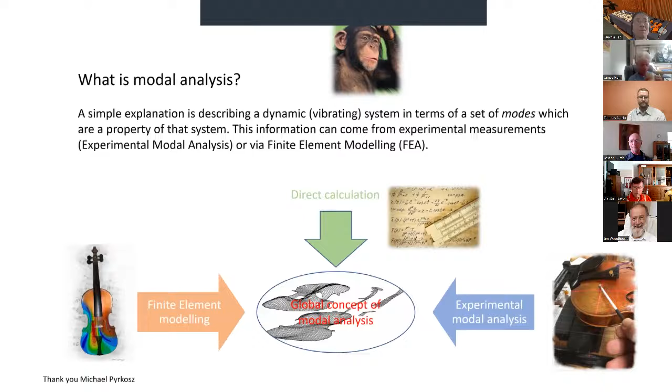So the first thing to say about modal analysis is what it is and what it isn't. So in fact, modal analysis is really a concept, meaning that you represent a system's dynamic behavior in terms of a set of modes, which are a property of that system. We can start to say where the modes come from a finite element model, or we can do it from measurements. And even for simple things, you can calculate it on the back of an envelope. So it's a concept rather than a specific activity or single task.

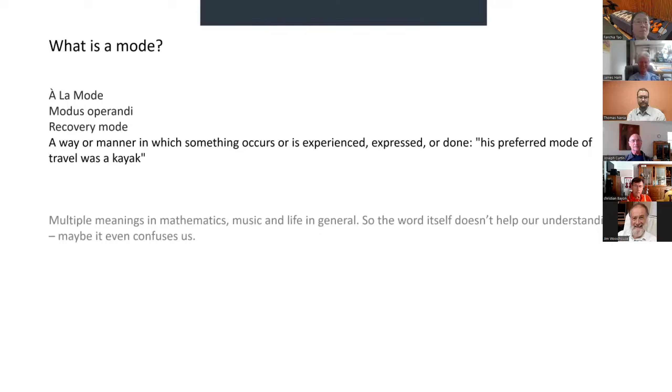Then obviously this is a question that comes up. What on earth is a mode? A mode. So I don't normally travel by kayak. So I think the first useful synonym really is resonance. So we're already familiar with the idea that various things sort of ring at a single pitch or multiple pitches at the same time. So I think if you blow over a bottle, that's quite a pure sine.

Okay. But lots of things have pitches simultaneously, and they aren't necessarily multiples of the fundamental, like a string. But anyway, let's not get bogged down. So this is an inevitable question, and there isn't actually a very easy answer, because you need concepts that haven't yet been explained. So the best way is just to start with some things that are kind of familiar. So we can say that a mode is, hang on, I seem to be missing a slide. Yes, got it, that's okay.

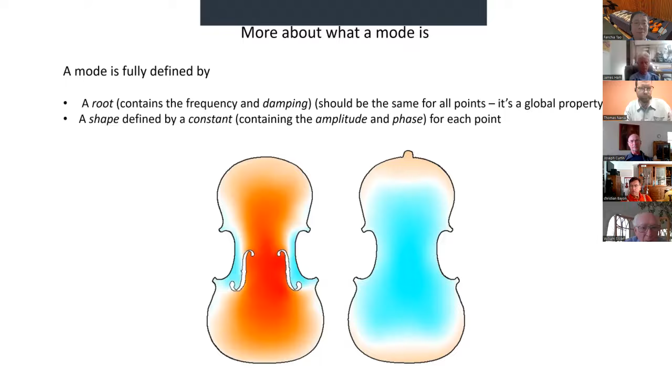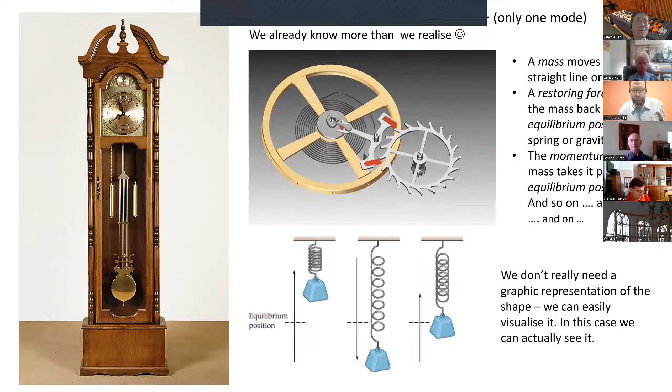And then we should be quite familiar with things like a weight on a spring. We can visualize that. So if the weight starts at its equilibrium position, we can lift it up or pull it down and let go, and then it will bounce, going beyond the equilibrium position and then back again. In none of these cases do we really need to create animations of them, because you can actually see it. It's slow enough to see exactly what it does.

Then a string does have multiple modes on the same system, and in this particular case, because the wave speed is supposed to be the same at all frequencies, the modes or overtones are very nearly a multiple of the fundamental, and they're always an integer number of half wavelengths. So the first one is approximately a half wavelength, and then you get two of them, 3, 4, 5, 6, etc.

So why do modes exist? In my mind, there are two main strands for this. One is purely about how the number of wavelengths fit into an available space, and examples of that are things like standing waves in a room. And then there's a similar idea. You could apply it to strings and beams, then ultimately to modes in violin plates.

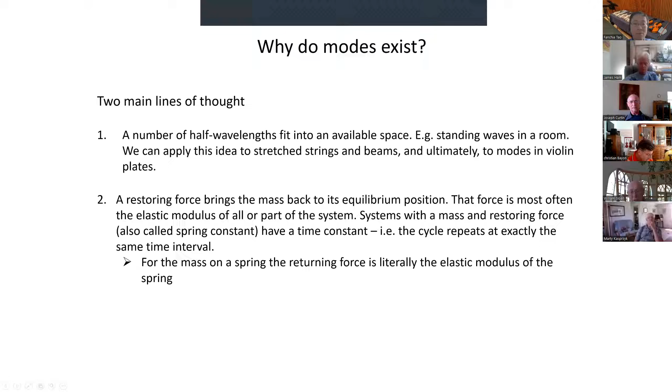In the case of the mass on the spring, that returning force is literally the elastic modulus of the spring. So you've neatly separated the two concepts into physically different parts of the little demo. And with the pendulum, it's gravity, and in the string, it's its tension, not the elastic modulus of the string, it's the tension. And in air modes, it's the compression and rarefaction of gases. So gases, if you can put them in an enclosed space, you can start to feel their springiness. Like if you put your thumb over the end of a bicycle pump, you can feel how strong the elasticity of the air is.

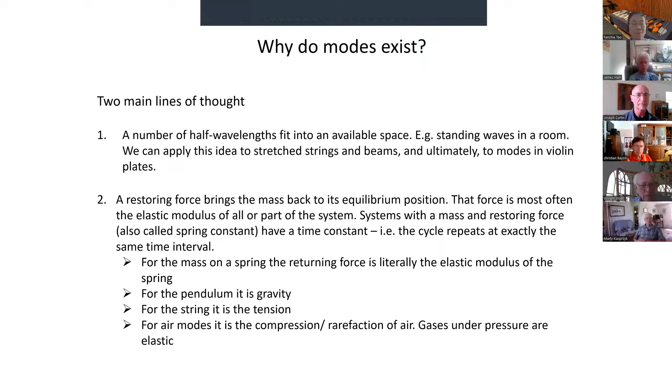And then if we animate them, we're going to have to slow it down, otherwise you're not going to be able to see it. It's too fast for the eye. And even better is if we've got a 3D animated plot that we can rotate at will to choose our view of it at any given moment. And then icing on the cake is 3D animated plots with a fully triaxial response, which we'll come back to in a bit, but that starts to get expensive and difficult, and that's not going to be one of the things the VSA kit offers.

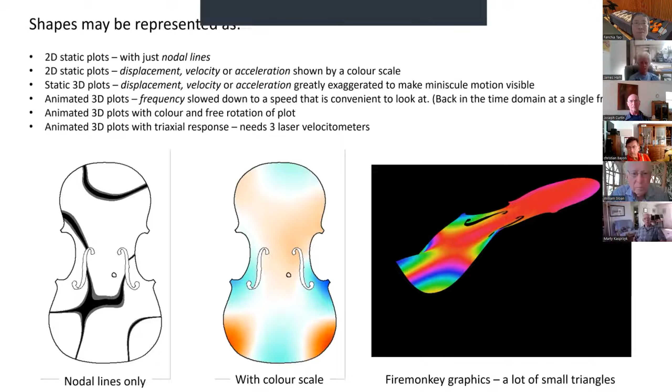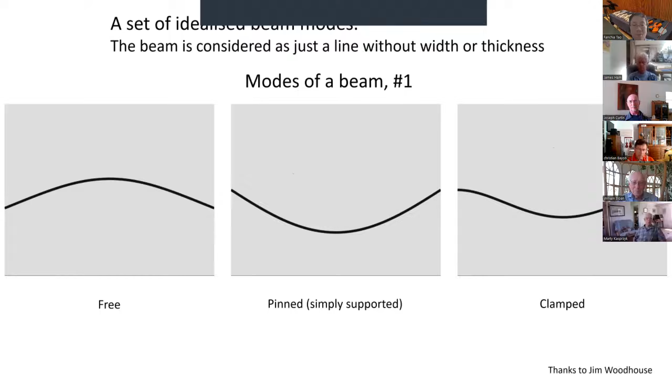I'm trying to, there we go.

So instead of being 1/2 wavelength, it's 2. And the animation runs a little bit faster to show that. So the ends are never nodes in a freely supported item such as a beam. In the case of a plate, you can have nodal lines that cross the edges, but they won't be nodal lines all the way around.

In the pinned ones, there's definitely a likeness between all three in the shape, it's just that the boundary conditions make them just slightly different.

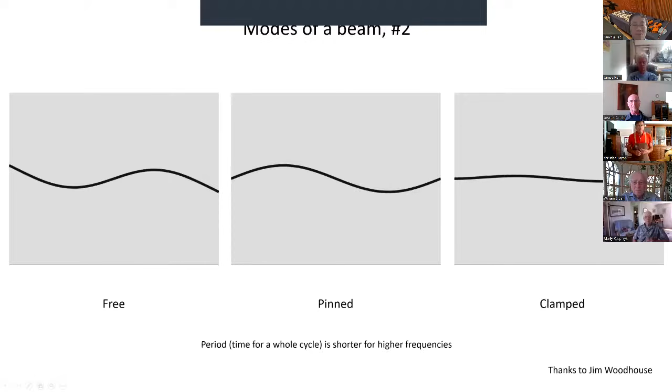Come on, next slide. And just the next one, same sort of thing. So we're representing the beam just as a single line. We're not making any attempt to make it visually realistic. Trying to, oops.

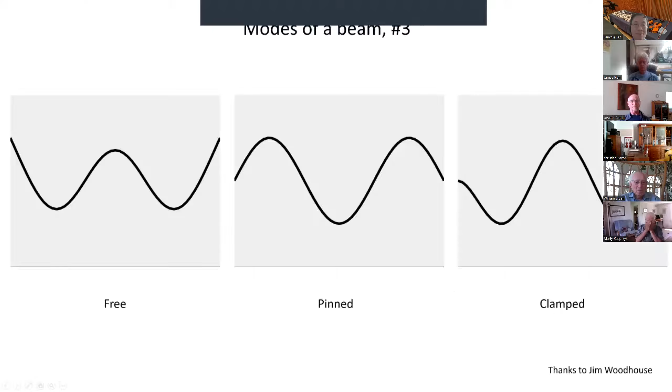This set are actual measured ones. I did some time ago a little course for students and makers at Bilbao. And one of the things we did was we measured a beam in different boundary conditions. And for the points that we needed to display the shape, we used 18 along the length, but that allows us to see the twist in the beam.

So because this was actually a real piece of wood, something like a cello bass bar, you find even at low frequencies, some of that motion that you would think would be just in the fundamental mode, actually a bit of twist gets introduced. That's just to do with the non-uniform nature of the wood. So you should be able to see that these look very similar to the animations that Jim Woodhouse has come up with for us.

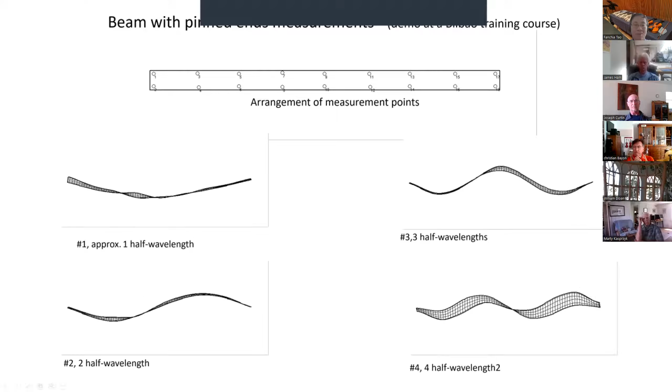So, trying to keep the mathematics down to a minimum here. Central really to everything we do with modal analysis and vibration measurements involves moving things between the time domain and the frequency domain. And in this black box in the middle is the Fourier transform. I call it the workhorse of acoustics and vibration engineering. And my little joke at the bottom says terms and conditions apply. So it's actually a very reliable algorithm, except there are some conditions one must observe to make sure you get good results. And I'll try and cover some of that a little bit later on.

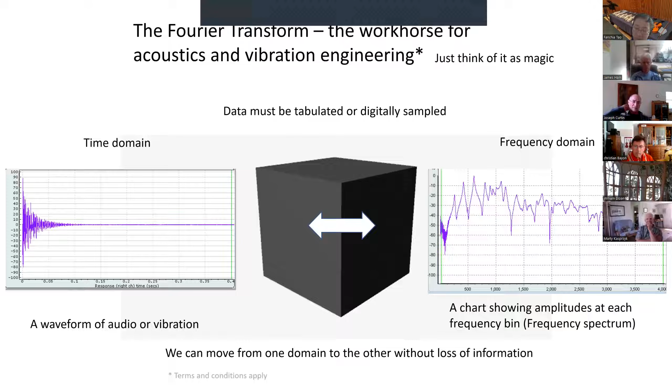So the chart on the left is a time domain one. That's the typical ring down of when you tap a violin. So it starts with a large amplitude with logarithmic decay. Then you've got a decision like where to chop it off. Anyway, I'll come back to that. But on the right, instead of seeing it as a variation in sound pressure level plotted against time, we see an amplitude plotted against frequency. So it's very, very important to get this idea that we can move between these two domains. But we're not going to discuss exactly how we do it or the details.

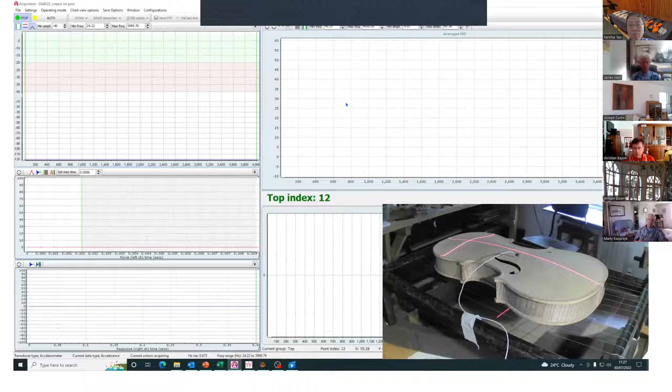Now then, I made a little video here, there is sound, but apparently it's so quiet, I'm just going to talk over it. So in the little pane on the right, you see a violin corpus sitting on a trapeze net, which is a frame with a network of 0.5 of a millimeter silicone thread, which is good because it doesn't keep stretching and it doesn't perish. Probably has some damping. And I have some laser lines which are useful for helping lay out the points.

So, okay, so I'm in the process of doing a modal analysis on a corpus without a sound post. As you see, the accelerometer is placed where the G foot of the bridge would be. It's supported on a silicone net. The threads are about 0.5 or so of a millimeter of silicone thread. And I have also some laser lines which I can move around as a guide. It helps me place the points.

I also have a sheet of paper which tells me where the points are, and I keep an eye on that in case I forget where they are, and keep an eye on the index as displayed on the screen. So I'm currently working on point number 12, which is here.

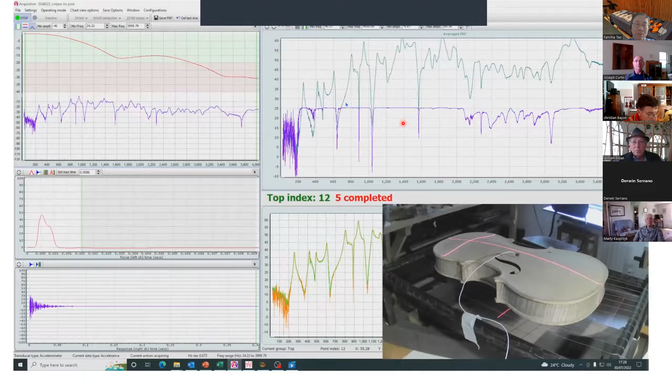So if, for example, I hit the wrong side of an F hole by mistake, that coherence would really drop down terribly. It tends to be poor anyway in the very low frequency range, possibly for some of the reasons we were discussing earlier, that the performance of the transducers at very low frequency is not so good. And perhaps we weren't actually able to put all that much energy into the system down there.

It tends to be bad anywhere where there's anti-resonance. So that's a position in the spectrum where the stuff above and below adds together in such a way as to create a null. Again, it'll be poor higher up if this response from the hammer drops too low, or if we get a deep notch, say from a double hit, we may have very poor data. These are things we have to work around.

I'm going to try and restart the video. Everything looks reasonable. I'll just let it run just so you can see the process, and write your questions down for later. Point 14 is halfway between here and the corner on the edge.

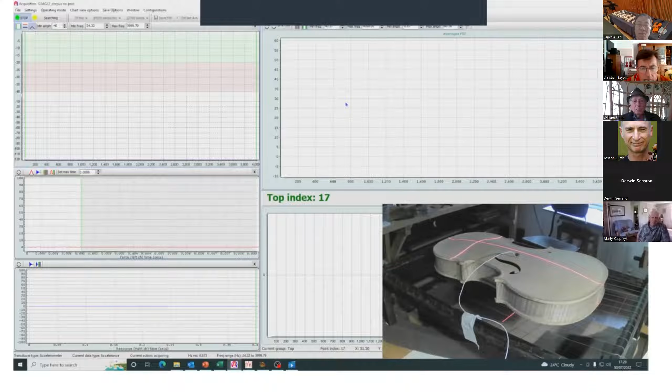If I set up rulers, I can actually read the laser line on the ruler, and I can place the points. Every single point sounds different. At least I can put a laser across. One way of getting better accuracy than a millimeter. You find you're hitting the same point again, better than a radius of about 2 millimeters around the point. And so on. That's that. So, okay.

Interesting to note that in the first mode, everything goes in the same direction. So if this shows negative here, it means in our plot we will see the deformation going downwards from the equilibrium position. If it's positive, we'll see it going up. So in the first mode of a pinned beam, everything goes in the same direction, but in the second mode and upwards, roughly half go in one direction and half go in the other.

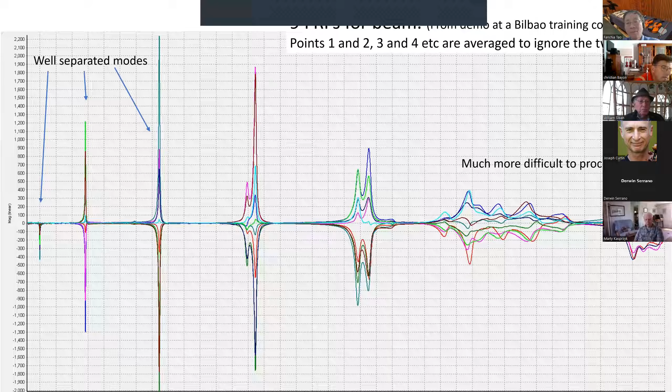The first three modes are nicely separated and they're quite easy to work with. But by the time you get up to the much more difficult to process region here, it's going to be relatively difficult to fit the modes and be sure what we've got. And this is an experiment, so just for the moment, let me get my laser pointer back. Let's focus on the first mode, which is in red.

Now, there's no significance to these colors. They're just a set of colors which make it easier on the eye to pick out one curve from another. If they were all the same color, it would be more confusing. So what I've done is I've laid out these FRFs in space, roughly in the position as they would be along the length of the beam.

So in order to get what I would call an operating displacement shape, which is not in any way processed, that's just the raw data from the collected FRFs. There's been no attempt to take account of the influence of other modes on the one we're looking at. So it's not quite zero at the end, but nearly. So that is precisely the shape that we see when we look at that mode.

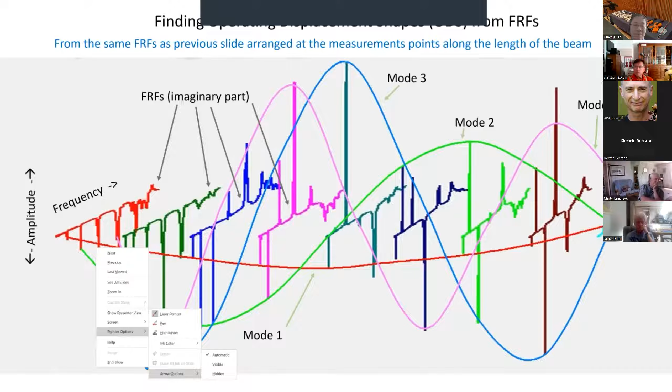And if I move to the next one, which is the green, let's follow that along. That's the 2 half wavelengths, like a whole sine wave. And the third one has 3 half wavelengths, and the fourth has 4. So I'd like feedback on this diagram as to whether it helps people to understand it.

So, I like that a lot. Thank you. That's helpful. Right.

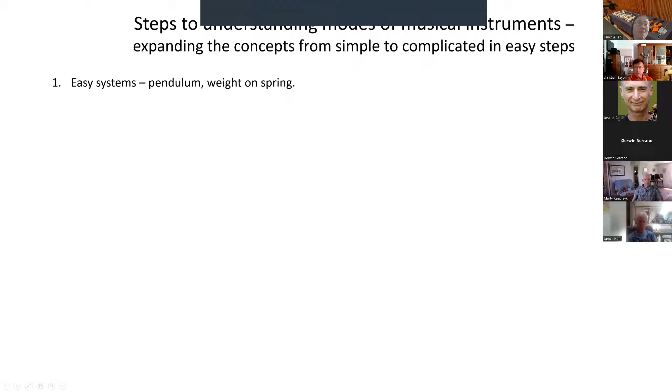So this is a little bit of a review of what we've done so far. We have easy systems, things like pendulums, weights on springs. Then we have a little bit more complicated things like strings and beams, which, so long as we consider a single polarization, that's we're only looking at one plane at a time, we can call a one-dimensional system. So our displacements are Z values along an x-axis, if you like.

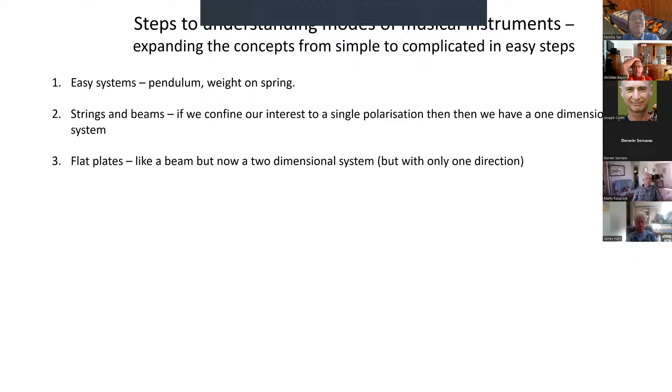Then we move to flat plates, which are beam-like, but they have sets of modes in both directions. So we'll call that a two-dimensional system. That is, the location of the Z displacement is on the X and Y plane. So X and Y take you to the point that has that particular displacement, and the Z is how far it is above or below the surface.

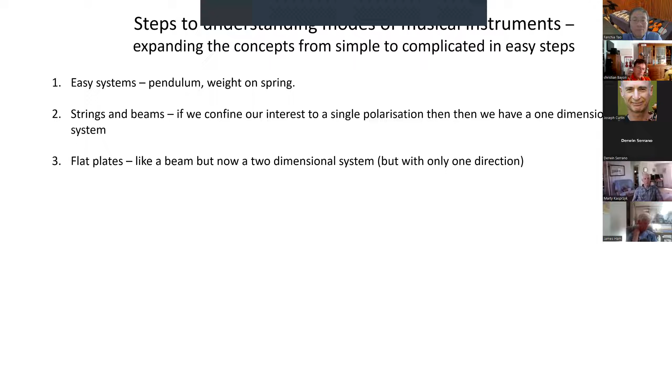Then we move to arch plates. They start to get harder to understand because it's no longer satisfactory to represent them solely with one displacement value. That's because an arch spreads out as you depress it and shrinks in as you lift it up in the middle. So it's more of a conceptual challenge. And this is a 3D system, but not easily represented from uniaxial measurements.

We move on. If we have triaxial measurements for each point, we have a full 3D representation. And that's the kind of data we see in the STRAD 3D project. And it is necessary, we need to see it, although it's not available to us all the time.

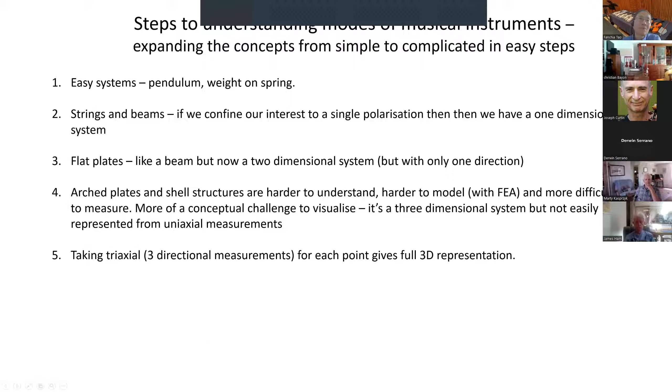And then we move on to an assembled instrument with strings. It's complicated because primarily it has this shell structure, it's already been perturbed with a sound post and to a lesser extent a bass bar. Makes less difference, you think. It has enclosed air. It has these substructures, neck, fingerboard, tailpiece, bridge and strings, and a support system. We unfortunately need that because we don't have access to a space station to do these measurements in zero gravity.

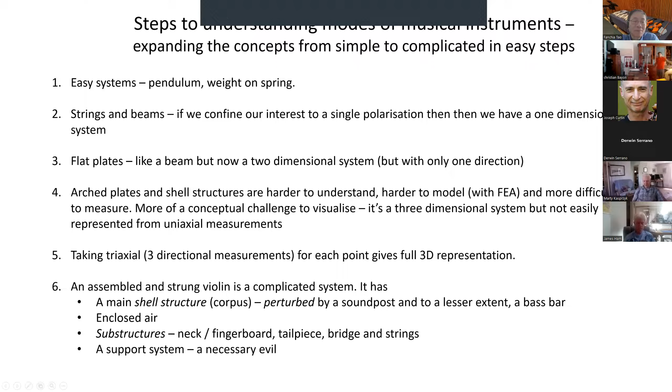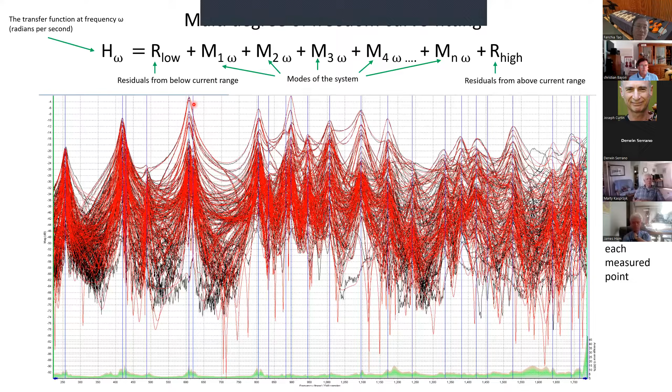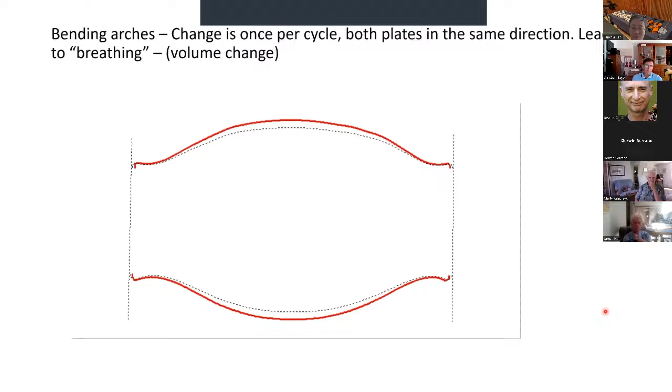And if there's slightly less of the back than there is at the top, which is normally the case, this will then lead to a corpus bending component, but still mostly breathing with a bending component. But if we're what we call anti-breathing, both plates go the same way, as in that mode that I called anticlastic bending, I think it was at 619 Hertz, their width changes in opposite directions, top and back. So this causes the anticlastic bending.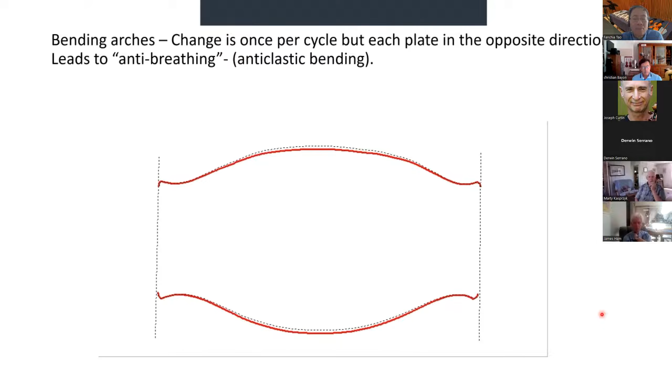So in these two plots, I've not put in any edge clamping effect, but in this one I've added some edge clamping. So I've used these nice Galleria Estense pictures. Thank you, Zanre and friends.

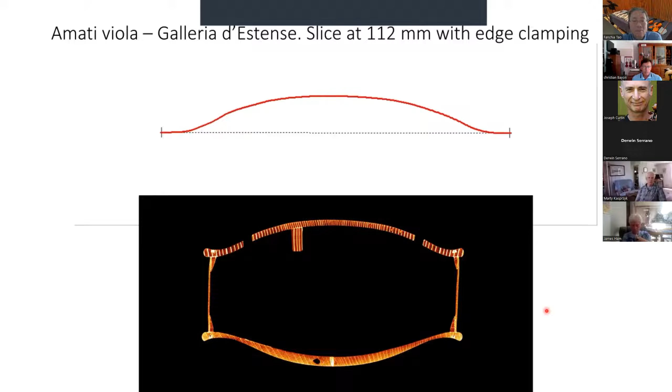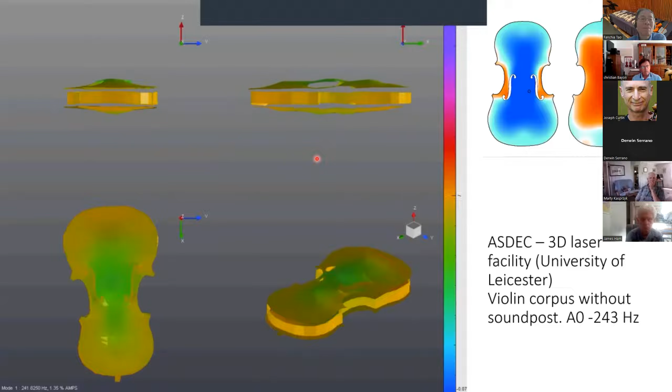And here is a fully 3D model with triple lasers showing an A0 mode. And here is my static plot, which shows the same thing. So if you look, you can see the width changing quite clearly. And you can see a small bending component along the length of the corpus. I hope that's clear.

And this is also done in the ASDEC facility, but it has bridge and strings and everything. And we're looking at the B1 plus mode, which is a combination of the anticlastic bending of the corpus and a breathing component. So as the C bouts move upwards, the back bulges out, and the island rotates. The G foot is lifting at the same time as the back bulges out, pivoting on the sound post. So this has significant volume change and is a good radiator.

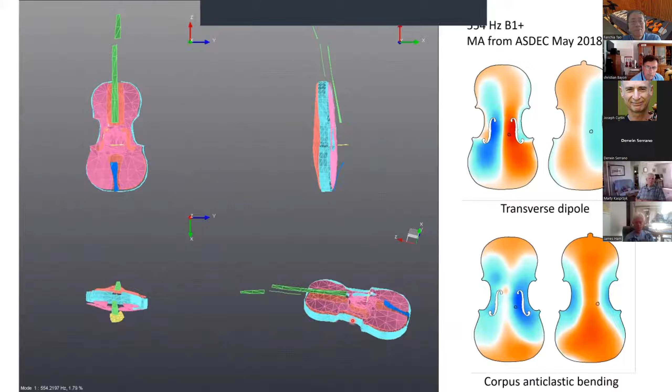On the right, just to remind you, I put the transverse dipole and the anticlastic bending shapes in the static version. So I think these two show you that anticlastic bending quite well. And this one shows you the width change. We've got more of these, which we can come back to at the end.

So each one of these lasers costs about £100,000, and the robot. So it's big, a human standing here, their head would come up to about that level. It's a big thing. This would be more than 100,000. The whole facility was about 2 million. They all sit on seismically isolated blocks. Didn't work out, unfortunately. They had to shut it down.

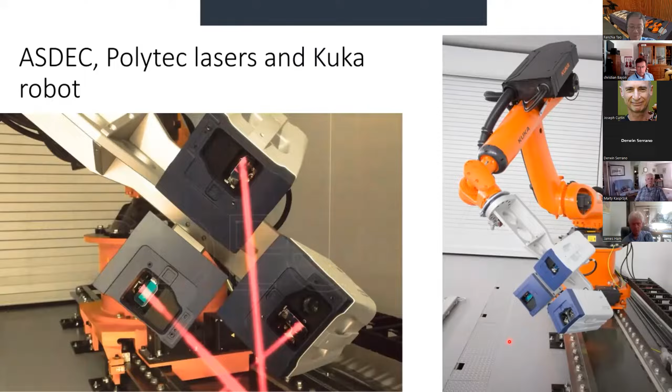I've shown this one before, but this is a nice animation because it's a CBR from the Titian Stradivari. All I've done is I've used the software provided on the DVD and the data, and I've made up my own animation. I've chosen my view and the way it's presented, just to make it easy to see the three-dimensional nature of the mode.

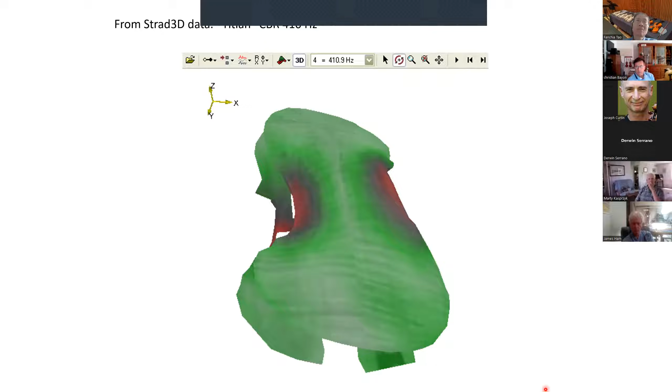So what is it for? Well, I have to get rid of the, can't have the, unfortunately I can't see my pointer while I'm doing this.

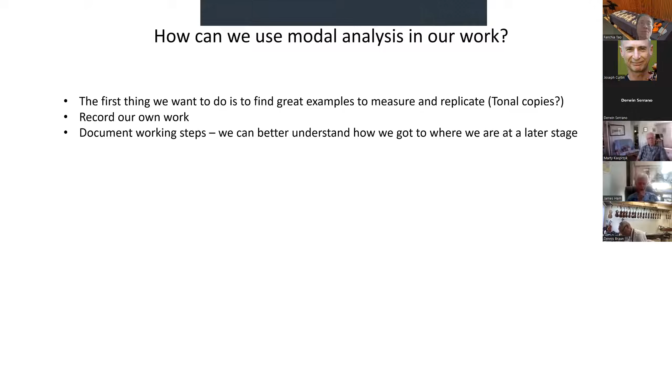Well, we've got a record of our own work, so the next time I make a particular model, I can go back and look what I did the last time and say, well, what might I want to do differently? And we document the working steps so that if I have an issue with it and I want to come back and think, well, what could I have done differently? I've actually got an awful lot of information.

And the working steps are basically graduating the plates, which I do in steps, and I might have target weights, target frequencies, and characteristic impedance. So it's not really making by numbers. Although I can get the same characteristic impedance value with different weights and different frequencies, it's not the same thing.

So I would say there's a sort of maximum weight I'd want to work with in a plate. I don't really want a plate with a bass bar that weighs even 68 grams, although I find a lot of old instruments that do have plates of that weight. And I don't really want it with a bass bar on to be less than about 56 grams.

And I don't want my mode 5 at the top, I don't want that to be before the bass bar. I don't want it to be 380, and I don't want it to be 280. So it's looking at a number of things at the same time. So I'm looking at the impedance, but I'm asking, how did I get there as well? So that will affect my judgment as to whether, when I'm graduating a plate, I've reached an end point or not. And if I haven't, well, I can always open it up and take a bit more out.

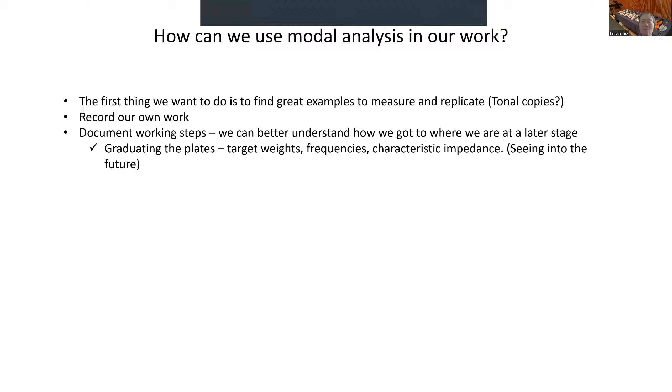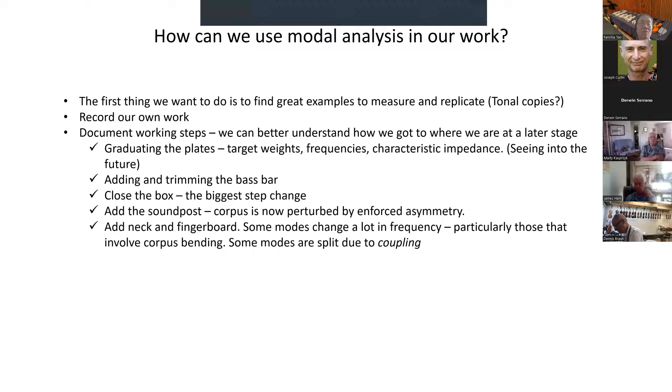Then we add the bass bar and trim that down. Then there are various sort of things one could follow for that. When we close the box, now suddenly everything is different. Those free plates behave in an entirely different way. And I put the sound post in. Now I've enforced asymmetry and added the neck and fingerboard. Quite a bit changes, and now it's a lot more complicated system. So if I go back and look at the box as it was when I closed it, then as I accumulate that data, it's like having free plate data but better.

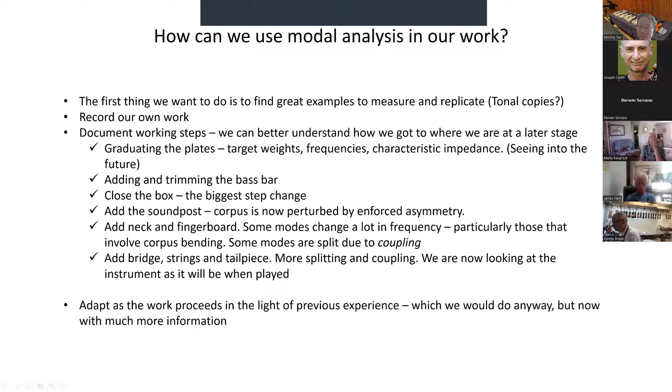Yeah, so each of these things we add increases the complexity of the system. And although, yes, I do want to look at the system as it is when it's played, it's not necessarily the easiest way to understand the kind of character of the instrument. And I can adapt as we proceed, which is, I think, what we would all want to do, wouldn't we? That leads us to some things that we've not necessarily paid attention to.

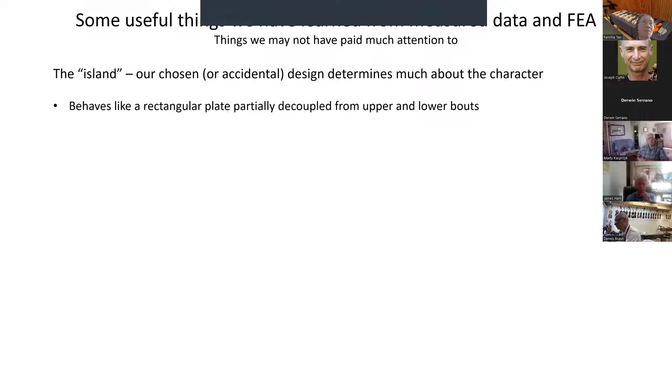So one of the things that came up, not just my work, this also includes Colin Gough's work with his shell models and things. So we find the island, it makes sense that the island is an important design parameter. To some extent, it's like a little rectangular plate with its own localized modes decoupled from the rest of the plate. Not completely, but somewhat. And its properties will in fact affect its modes, and therefore it will affect the performance in a way rather similar to how things like the bridge rock and bounce control performance.

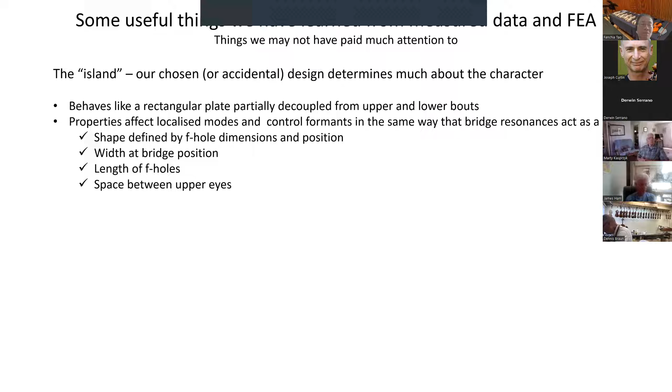So when we think about F-holes, we think about the shape of the F-hole and how they look sitting there on the top. But in fact, another thing they're doing is defining the shape and dimensions of the island. So we're interested in the width at the bridge position, the length of the F-holes, the space between the upper eyes, which is where most of the decoupling takes place, the graduation.

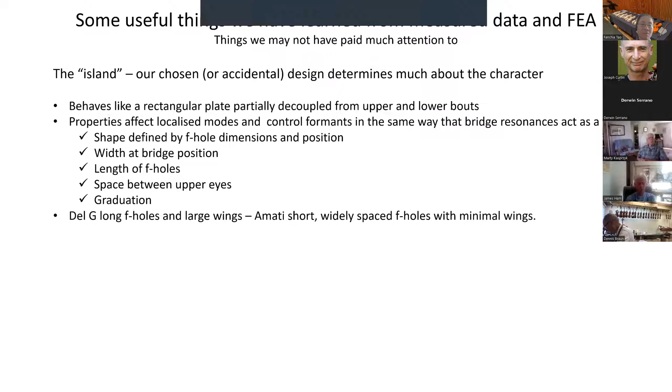And as an example, we see some Del Gesù models with very long F-holes, with big wings on them, and say early 1600-ish Amati instruments with relatively widely spaced F-holes, very short, like violas with violin-sized F-holes, minimal wings. And then the edges, which I've been mostly making to standard dimensions.

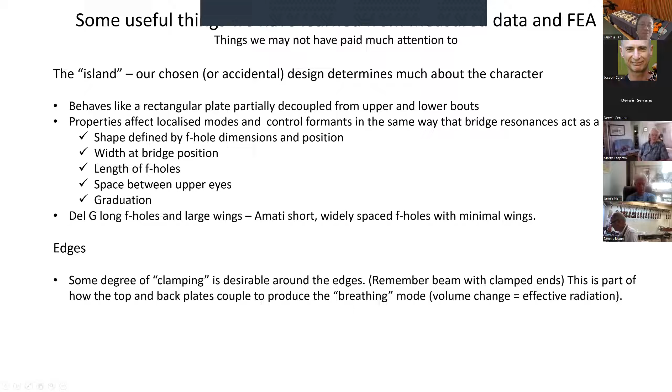But in fact, if we think about this degree of clamping around the edge, if you can remember those three animations I showed of the plates changing width as the corpus breathes, we can see that behavior of those edges is important. It's very crucial for that coupling. So the outline itself actually creates a bit of clamping, because if you think of the C bouts as three sides of a box, there's already some rigidity in that as a unit.

Then there's the thickness near the lining, there's the lining dimensions, and there's the rib thickness itself. So there are a number of things that take place in the way that the rib garland glued to both plates creates boundary conditions for both plates, and each plate is a contributor to the boundary conditions of the other. So these various springiness characteristics of the ribs, I think, are something to pay attention to.

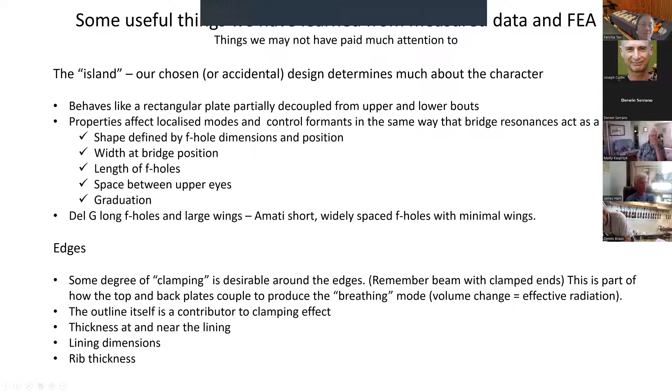I hadn't wanted to include this, but this is the pinned edge rig for holding the plate in this condition where the edges cannot move in the vertical direction.

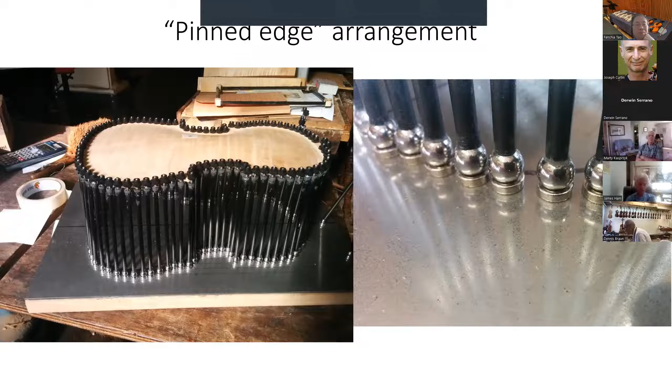This is in French, and this particular plot, they're a bit small, but what they show is these are average frequencies of mode 2 and mode 5 of free tops and free backs. They're various colors, so they're averaged, and these little error bars show how much variation there was. So there's a medium step here before the bass bar is glued on, and then after the bass bar. So there you can see the mode 5 goes up quite a lot after the bass bar is glued.

Well, we know that. Here, for some reason, Victor and Joseph wanted to include the back in a half-graduated state. I think it would have been better to leave that out. Anyway, that's the way they've done it. And on the right is the same information, but with the pinned edge condition.

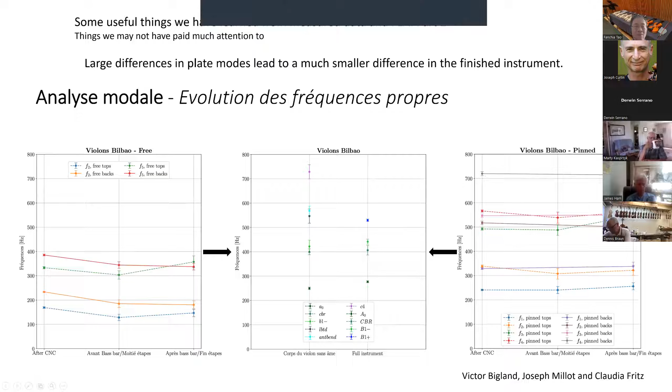And in the middle there, the empty corpus, empty shell, as Colin likes to call it. So it's corpus without a sound post and neck. And there's the full instrument with the error bar. So I wanted to show you this just to help you understand what you're looking at, but it's this next run that is interesting. So in the Bilbao experiment, all the plates were cut on a CNC machine to be as dimensionally identical as possible, and we selected the wood to be as identical as we could get it.

So here, this comparative is the standard deviation, and we divide by the frequency, because otherwise the actual variation in frequency is misleading. If it's 10 hertz but it's at a kilohertz, that's nothing, but 10 hertz at 50 hertz is significant.

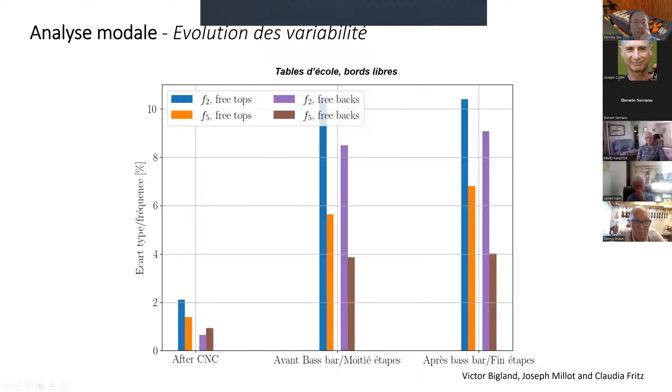So we see, in this, the intention was to make the plates different. So that's as we expect. There's large differences between the tops. They started out the same; by the time they finished, there's large differences. So this one is that same plot, but these are the 6 violins made in the school, very carefully controlled. And these are another set of violins made by external makers.

And the first thing we can see is, although dimensionally all the plates were similar as they were for the school 6, the variation is much greater. That means that the external makers were either unable or unwilling to select wood within the density parameters that we had suggested. Now, whereas in the school instruments the differences get much larger as the work proceeds, because that was the intention, it's the other way around with the external makers. They tend to converge towards more similar results.

So looking here, we're looking at the corpus without a sound post and the full instrument. So the actual differences become rather less. If we look, we have some modes where this standard deviation over frequency is in excess of 10, but by the time we've assembled the instrument, it's only about 2, with the exception of CBR. Now, in all cases, CBR is the mode that has the biggest variation.

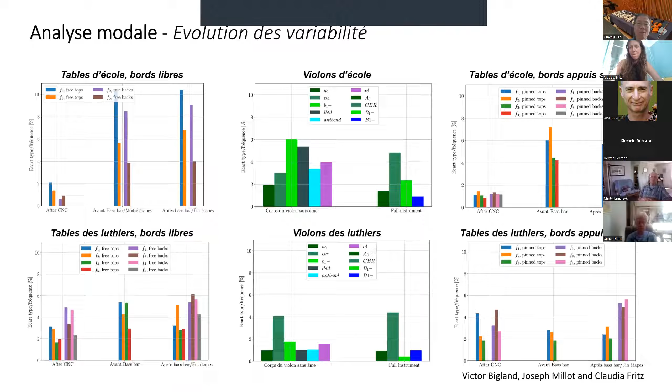And I think that was already shown a bit by, what's his name? Martin Schleske. He made one article in the Catgut or the VSA paper that was trying to follow the modes of a full experiment, and he concluded that as well, that there were fewer differences at the end than what you could have expected from the plates.

But interestingly, when we look at the pinned edges plates, we have something which is closer to the final picture than when we look at the free edges plates. So that's maybe an indicator that measuring the plate with pinned edges conditions may be more interesting than with free edges. I agree. I'm continuing to work on it, but it's not without its problems.

Yes, it's remarkable in the external makers, what's that one, the green one? That's that B1 minus. Hardly any difference at all.

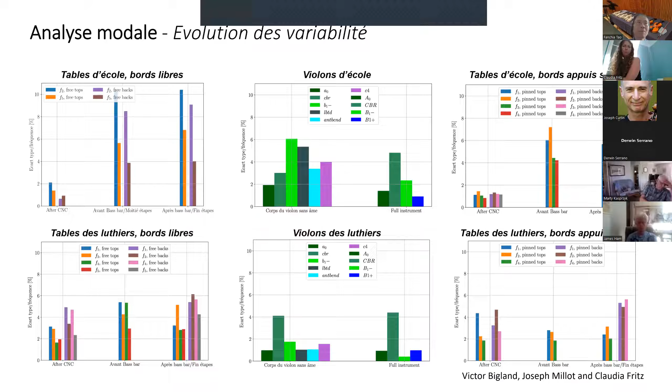Anyway, we've got a little run of thinking stuff, and then it's all pictures from then on. So we have this sort of diagram. Down here this is the workshop, the bench, and we've got a drawing board; we design instruments, select our materials, build the damn thing. And over here, we evaluate the instruments. So that's listening and playing. We do that to some extent ourselves anyway, but then we've got the acoustic measurements.

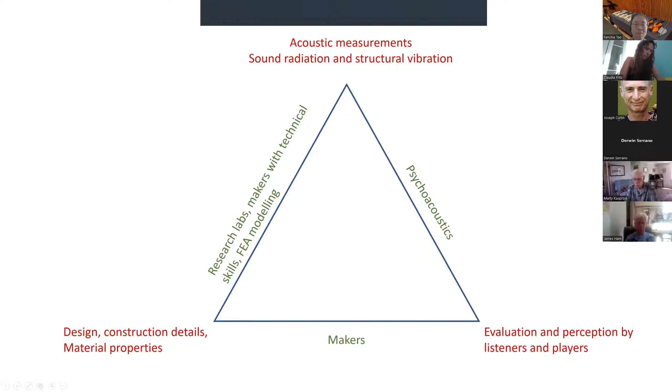Now, how do these three zones interact with each other? I'm building it up in bits. If you're a research lab or you're making with a bit of technical skill, and we're all going to be doing it now with the VSA modal analysis kit, we can draw the connection between the constructional parameters and the acoustic measurements and sound radiation. There is a causal relationship there, but to connect with those evaluations by listeners and players, we actually have to have psychoacoustics. But as makers, we try to short circuit that. We will just play them ourselves and try and make judgments.

So our designs might be very simple, or they might be elaborate meshes on computers. It's not so difficult at all to learn to do these measurements. Learning how to interpret the information is something else. But we can always improve our skills as listeners. So in training courses and workshops that I do with Claudia, we always do listening tests, not just as experiments, but as a training to help people be more sure about what it is they're hearing.

And finally, we'll say, well, definitely there's a causal connection. That connection tells us that something needs changing. This area here tells us possibly what it is, and then we can go back and redo the work here. Along here, we want fairly empirical, visceral experience, an intuitive relationship between things that we do with our sharp tools and the end result.

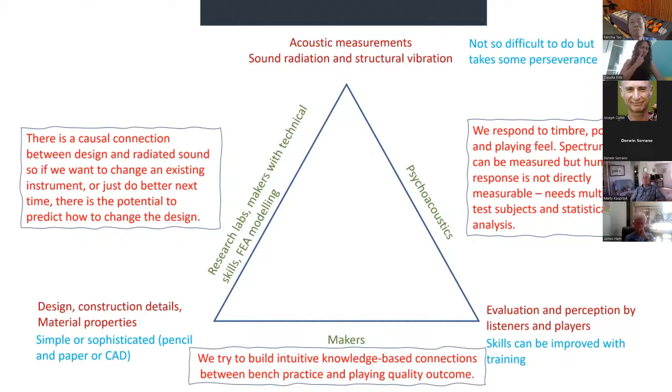But this part of it, ask Claudia, she's here, the whole business of trying to get meaningful information about how people perceive instruments is fraught with problems, because you cannot measure humans in the way that you can measure a structure. So you have to set up experiments, and you have to statistically process the responses that people give. So it's difficult, but it's not without some success, I would say. Progressing. Now then, I can start to relax, because it's just pictures.

So this is an interesting question about domains. If I hit my violin with a hammer, all the modes of the system ring down simultaneously, and the motion is going to be very complicated and pretty well impossible to understand, which is why in the first instance we split it out from the time domain into the frequency domain, where we can look at it one frequency at a time or a single mode at a time.

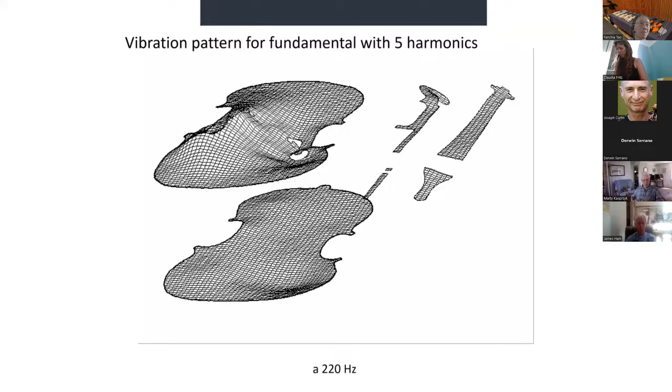So we play the A. Still some CBR there, but some other things. We start to see the scroll twist come in. B, lot of tailpiece activity. Now, I don't want that tailpiece activity too high. It can be a nuisance. But now we start to see we can get very high velocities, particularly at F-hole wings.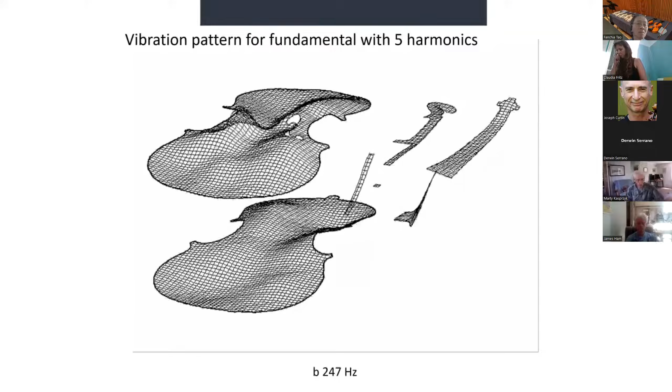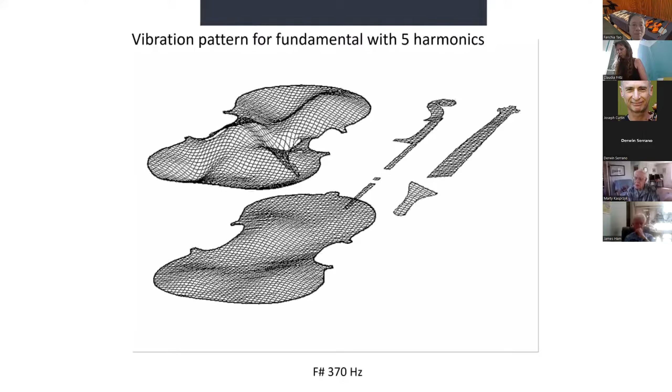The B, so we're getting towards A0. So pretty complicated. The G, once again, because that's close in frequency to the CBR mode, it's dominated by that. Does that make the tone better? I think probably not. It could give a risk of some wolfiness.

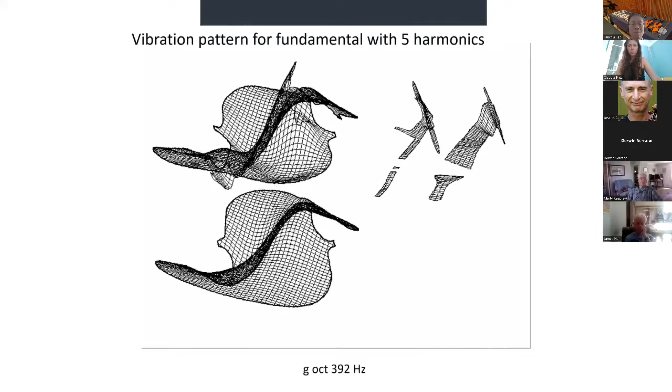Anyway, that is the end of the talk as prepared. So I'm going to stop the share for now, and then we can come back and decide if we want to see some more animations, or whether a full-blown argument is going to break out.

All right. Thank you, George. Okay, you're very welcome. I wasn't much over time. I was slightly over time. No, but you packed a lot of stuff in your talk. Yeah, I did, yes. If everybody's a little bit tired, you could just take a... You can't see me. I'm doing a bit of Tai Chi breathing to feel calm.

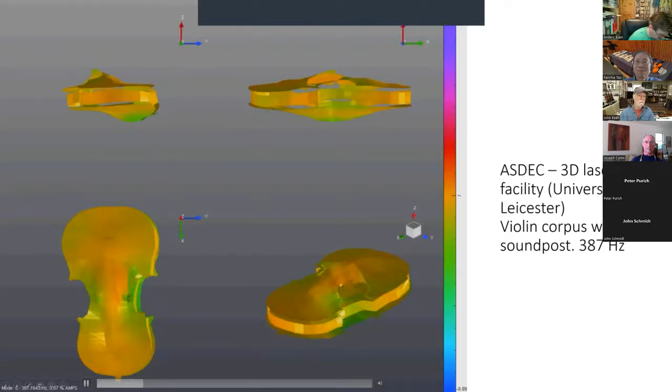So, people talk about shear in the CBR. So you see the two plates crossing over each other around the C-bouts. Do you see that? If I get my pointer. See here, they're crossing over each other. At least they appear to be when you look there.

But if you look at this one, see how that C-bout is rotating as a unit. And then it's taken up simply by twisting the ribs in the upper and lower bouts. So there's no actual in-plane deformation of the ribs necessary for this to happen.

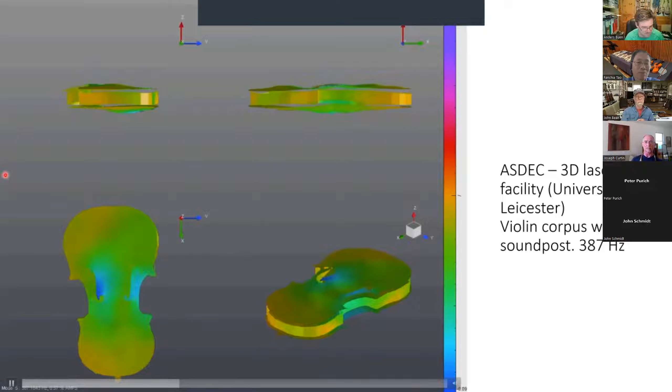So here's with the neck and strings. So actually, that one really shows you. So the G side is going towards the back, and the E side is going the opposite way. So it's left-right anti-symmetric. That is to say that the left side does exactly the opposite of what the right side does.

I mean, although CBR is not really an important radiator, it is an important mode for seeing how the corpus functions. It's a very good example of the 3D behavior. So if you like, the corpus bending that you see a little bit of in A0 and in B1 plus and B1 minus, they're in fact like a symmetric version of this type of rib motion.

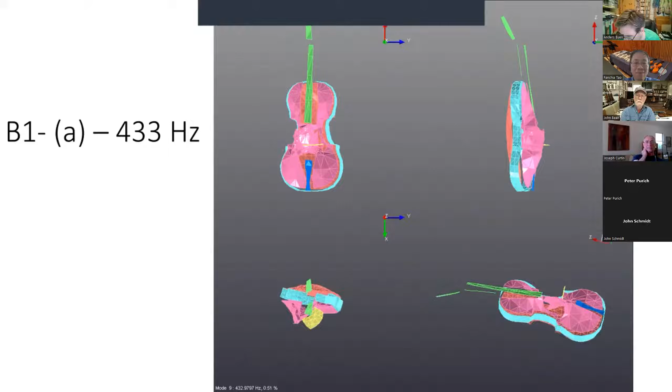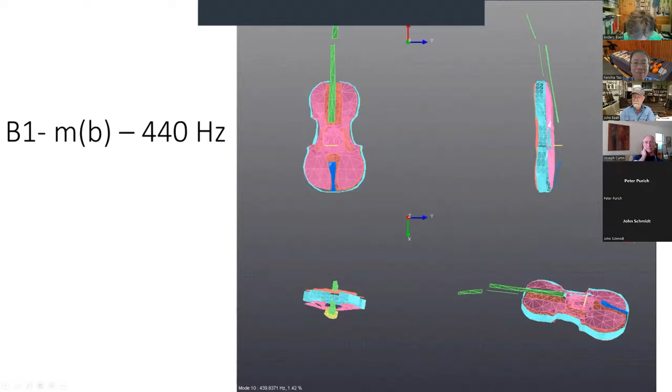Yeah. So if I go, so here's a B1 minus. And then, actually, this is a better version of it. That one was a coupled version. Interestingly, see how most of the activity is taking place on the G string side, expansion that way. And the top is the major contributor to the volume change.

But when we get to, well, this is the longitudinal dipole. That's basically because the walls are interacting with A1 of the enclosed air. And then the B1 plus, you can clearly see the corpus, but as the ribs come up, see it's pinching the back across the waist, making it bulge out.

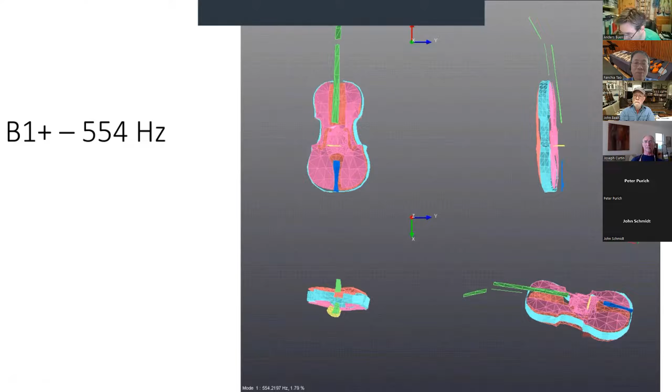Does that help? It helps. Let's go back. Just go back again to see. Yeah, it's a lot to understand how they affect sound, because I see a lot of twisting, and then I'm not sure exactly what that's going to do to what.

I think to look at mode shapes, you need a toolbox of component motions. So that's why I keep saying things like corpus bending or CBR twist or longitudinal dipole, transverse dipole. That's because these are conceptually easy to visualize. But in fact, the more complicated mode shapes can be built up out of parts that are relatively not so difficult in themselves, but difficult to conceive of all at once.

Great. Everything everywhere all at once. Great, thank you. You know what I'm talking about. Some of you obviously do. Yep. All right. So back to Anders.

Okay, thank you. I wonder, George, which version of your programs do you recommend that we use now? I guess it depends on the ones. Sorry? The most recent ones. Okay. Well, I keep making changes, but there are some quite big jobs in the programs where I need to immerse myself for weeks, and I actually want to change the platform. I want to move everything to a FireMonkey platform, which will run on Macs and Linux and even Android phones.